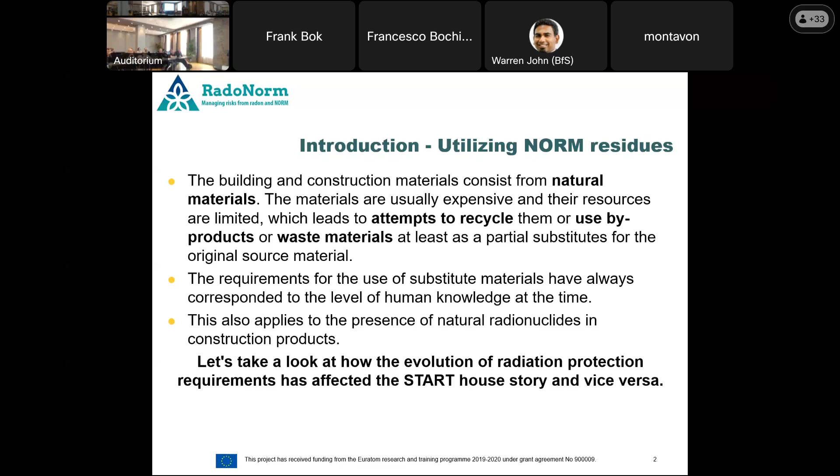If we want to reuse materials, we have to be aware how they can influence our product. And of course, this is strongly related to our knowledge, which changes in time. And this is not only for natural radionuclides present in construction products, but for many other things like toxic metals and so on. But today I would like to talk about the old story which we have in the Czech Republic, the case study of start houses, and how we can benefit now from the past.

So let me describe the case study. For some of you who already know the topic, there will be nothing new. But for those who see this for the first time, I will briefly describe what happened. There was a small power plant burning coal, but some of the coal had elevated content of radium and uranium, and the slag was valuable material also 50 years ago. So the state enterprise Prefa Hyskov produced slag concrete panels out of this slag and built several apartment houses at the beginning of the 60s last century.

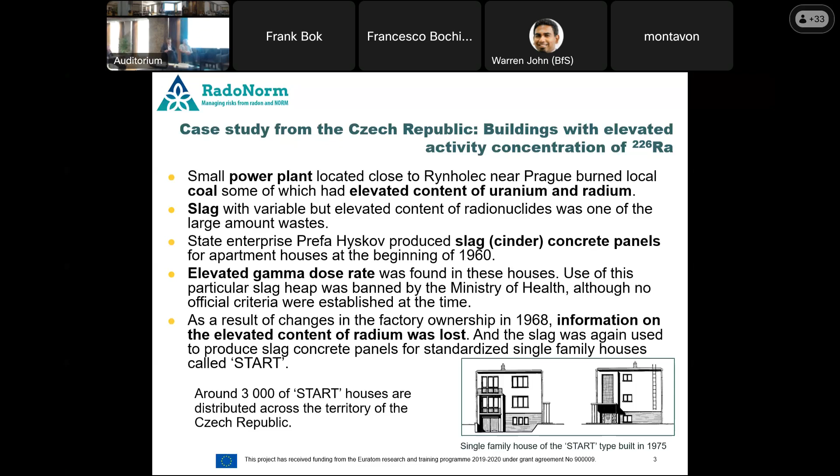Then, by surprise, elevated gamma dose rates were found, and the use of this slag was prohibited by the Ministry of Health. But during the changes in ownership in 1968, the information about this contaminated slag was lost, and the slag was used again for production of concrete panels, which led to more than 3,000 single-family houses built out of these slag concrete panels. You can see in the picture how they looked. There was a standardized project for these buildings.

What about the radiological surveys in these houses? Well, the concrete panels were used for supporting and peripheral walls and also for building a chimney, and the rest of the walls were from standard bricks. So the variation of gamma dose rate was quite high in the building. There was an extensive measurement campaign between 1989 and 1991 to determine the situation in individual houses. They found all the owners, all the houses, and measured in all of them.

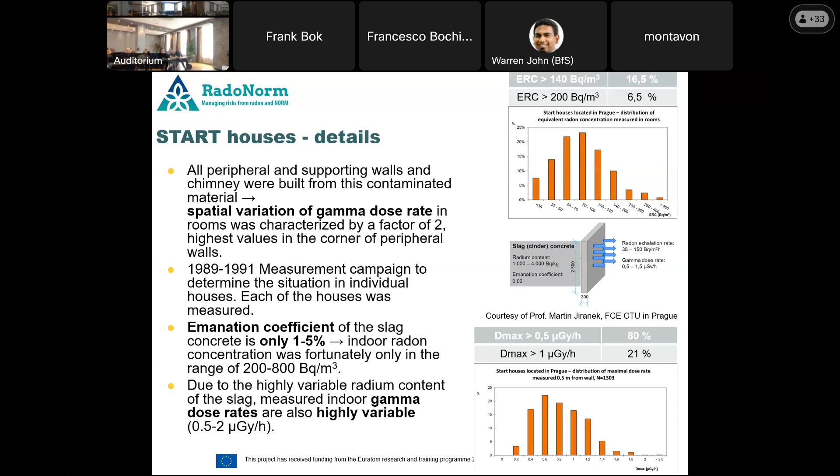So, for example, from the Prague region, you can see the charts of the distribution of equivalent radon concentration, and you can see that it was not that extremely high. But you can see also the distribution of gamma dose rate, which was quite spread, from below 0.5 microgray per hour up to 2 micrograys per hour. But these were quite few cases. What is important here is that the emanation coefficient of radon was quite low, only 1 to 5%, which caused not that high radon concentration indoors.

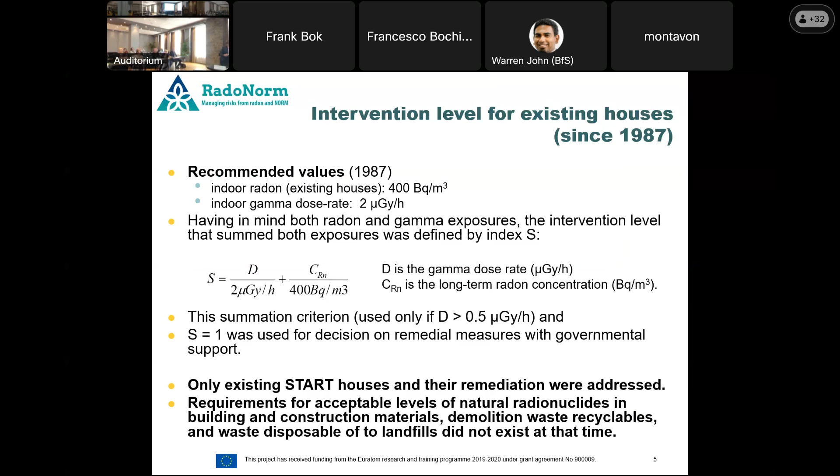The situation and the discovery of this case caused changes in the legal framework of the Czech Republic, Czechoslovakia at that time. At first, it was applicable only to start houses, and there was a recommended value by the ministry on indoor radon concentration and indoor gamma dose rate, and there was a defined summation criterion, mainly used for decisions on remedial measures with governmental support. No other actions on building materials and radon were taken at that time.

But after the Velvet Revolution, there were a lot of people who wanted to solve the situation with their houses, which caused further development of the legal framework and resulted in several implementation steps of protection against elevated concentration of natural radionuclides in building material, and radon concentration indoors was also reflected in these decrees or legislation implemented in the Czech Republic.

So you can see, I will not go into detail because you can read it, but just to point out that from the beginning, from the discovery of the start case or Prefa Hyskov case, the criteria were quite strict for habitable buildings. For the mass activity concentration of radium-226, the allowable was only 120 becquerels per kilogram, which is quite low for present days. Then it was a bit exceeded, and still there was an action level and limit value, because it also reflected the exhalation of radon from the building material.

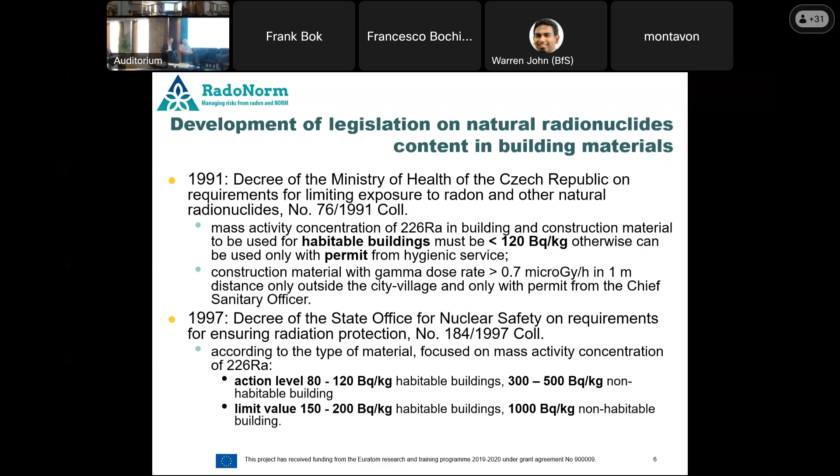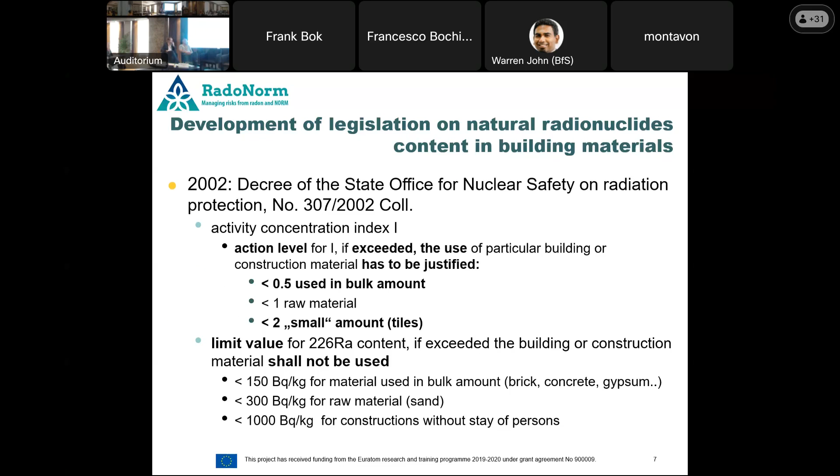So you can see that there was a distinction between habitable buildings and non-habitable buildings. And also the building material was not building material itself, but also construction materials. I mean building material as it is understood by the EU BSS currently. Then the next step was the implementation of the activity concentration index. And still there was a distinction between requirements on the activity concentration index and the limit value for radium-226 as a source of radon.

Skipping from legal framework development to standard life, thanks to the effective legal framework, there was no more issue with building material contaminated with natural radionuclides, which were not available on the market anymore. But still we had the start houses, and they changed owners over time. They were inherited or sold. And unfortunately, a lot of information has been lost over time, on purpose or just lost. And the elevated exposure to radiation has also been subject to several lawsuits.

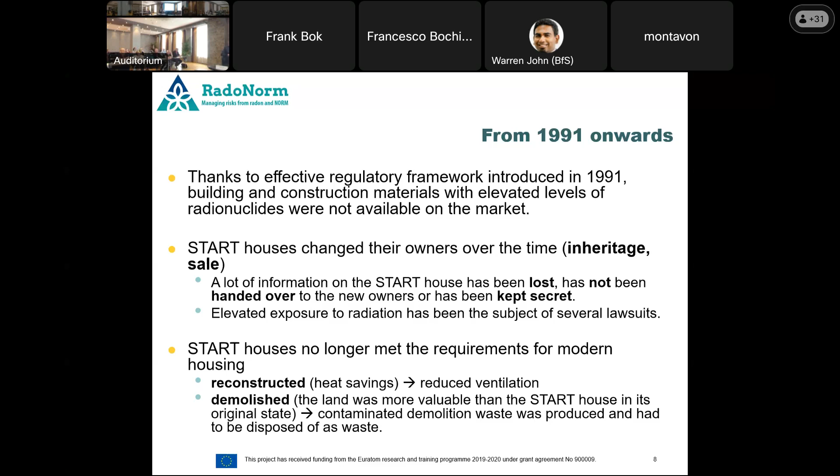And as time went on, start houses were no longer acceptable for some of the owners, for the modern style of living. So they were reconstructed or demolished, because the land had a much higher value than the building itself. So let me focus on the reconstruction, which for these old buildings is usually focused on reducing the cost for heating. So they were thermally retrofitted.

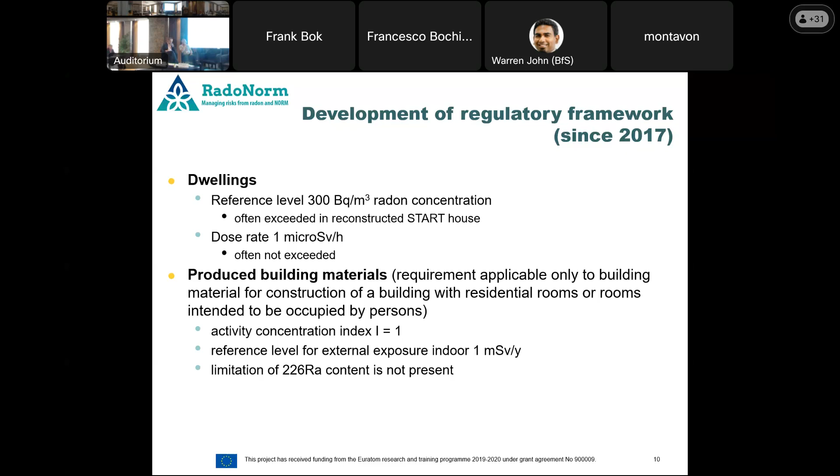So jumping to modern days, the development of the regulatory framework continued slowly. We implemented the EU BSS, the latest directive, in the Czech legal framework. So we now have a reference level for radon concentration, which is often exceeded in the start houses compared to the situation before. The reference level for gamma dose rate is 1 microsievert per hour, which is usually not exceeded. Produced building material, only for habitable buildings as prescribed by the EU BSS, is under control. There is a requirement on the activity concentration index and the reference level for external exposure indoors. It should be less than 1 millisievert per year. But we lost the requirement on maximum content of radium-226 in the building material.

What I would like to present you now are brand new data we have in the Czech Republic, and they are connected to air exchange rate measurement. I mentioned before that air exchange rate is quite important when we modify our buildings to the modern style of living, which usually requires reduced cost for energy and low energy consumption. So air exchange rate is defined as the flow rate through a building normalized by its volume.

And on this chart, and on the next slide you will see it in more detail, you can see the monthly average air exchange rate measured in nearly 300 dwellings, which was done as a part of a research project, which is coming to the end in the Czech Republic. It's basically the representative survey of radon, and connected to it was the measurement of air exchange rate.

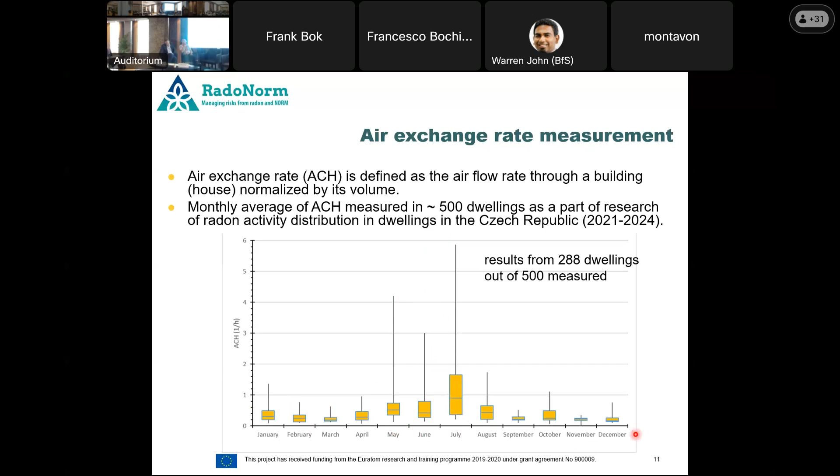So you can see that it's by month, and there is nice variability during the year. I will try to use the laser pointer. You can see that January, the winter period, and the summer period differ a lot. During the summer the ventilation, the air exchange rate values, are quite broadly distributed. During the winter, they are quite close and people save. They are not ventilating much.

So here you can see it in more detail. And also we added 2 lines representing the minimum hygienic standard ventilation, which is 0.3, and this value is prescribed by the technical standard applicable in the Czech Republic for habitable rooms. And also 0.5, which is since 2012 the minimum required air exchange rate in habitable rooms by a decree on

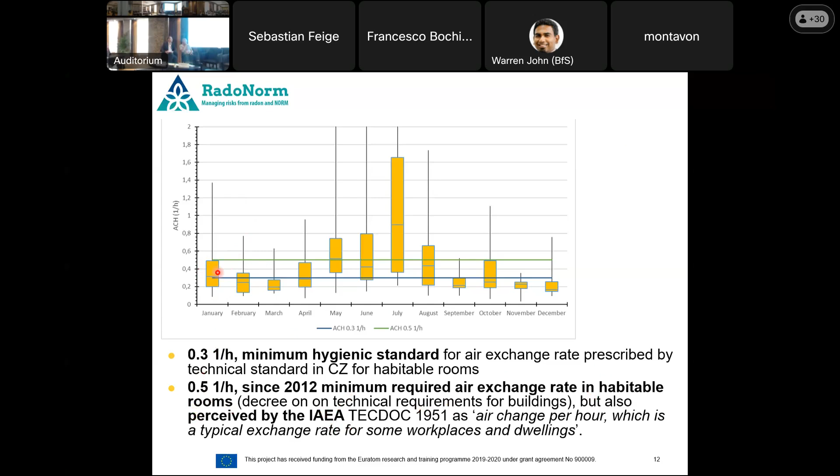technical requirements for buildings, but also this value, 0.5 changes per hour, is perceived by the IAEA TecDoc 1951 as the air change per hour which is typical exchange rate for some workplaces and dwellings. And you can see on the chart that we really do ventilate much less.

So why is it important for reuse of NORM residues? If we have much lower ventilation rate, then having the same activity concentration and emanation rate, we will get much higher radon concentration in the building which is built out of this material. We were lucky that the slag concrete panels had very low emanation coefficient or exhalation coefficient, around 2% only. And the gas silicate bricks have 10 times higher emanation coefficient, which I know is a conservative calculation, but the radon concentration may reach up to 4,000 becquerel per meter cube.

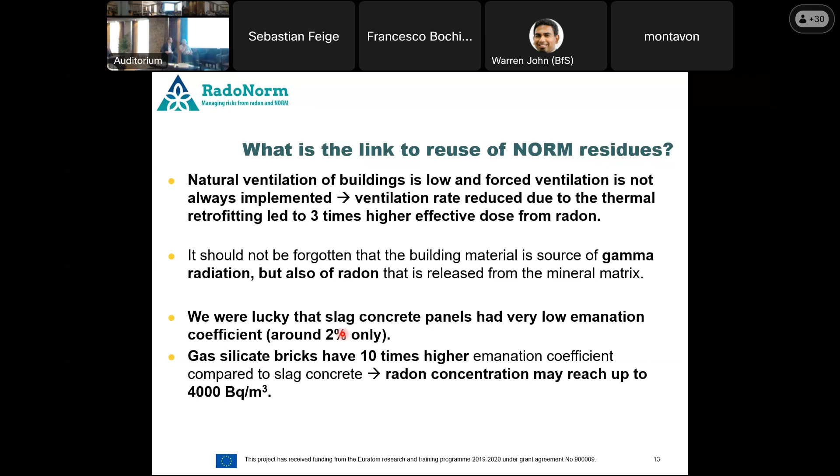So by this, we want to emphasize that it should not be forgotten that the building material is, yes, a source of gamma radiation, but it's also a source of radon, which is released from the matrix.

Few more comments on the reuse of residues. The EU BSS focuses on building material, which means the construction products which can be used to build habitable buildings. But there are also products. The manufacturer can put on the market a product, which can be, for example, a recyclate, on which there are no requirements on content of natural radionuclides.

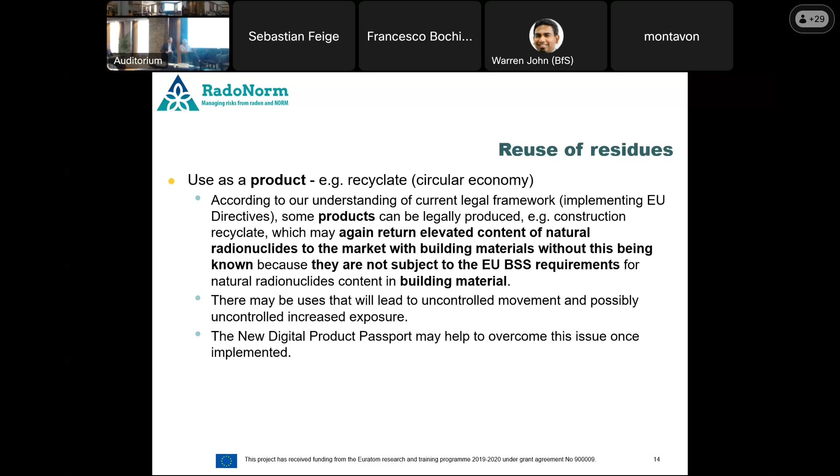So we see this as a way how there can be some uncontrolled movement of possibly contaminated material, which can be again put on the building market. Fortunately, there is something which is called, or which will be called, a digital product passport, which probably may help to overcome this issue once it is implemented, and it's still under discussion, as I was told.

So coming to the summary, definitely it is beneficial to use NORM-based products, byproducts, residues, it depends how you call it, because it's better to use them rather than to dump them to the landfill. But we have to know their properties, and among the physical and chemical properties which are usually being tested, we have to know the activity concentration of the radionuclides. Otherwise, the history may repeat.

Regulation of both the content of natural radionuclides and radon exhalation is gaining importance, especially because the ventilation of the buildings is low, as you saw on the box plot. And unfortunately, there is still limited harmonization between indoor air quality programs, energy saving programs, and radon action plans. Actually, it was proved also by Tanya Perko's study.

And the last comment, we should keep the communication channels open, even for the cold cases, to remind people what happened in the past so they can benefit from it in the future.

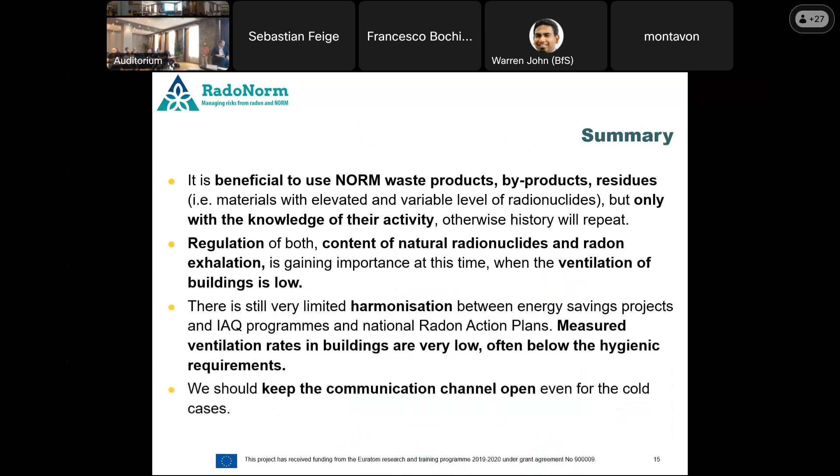There are some of these, but the history, I think, was never published in English. I mean, the history. I remember we have published, regarding these houses, the energy consequences if you make an energy conservation of such buildings. We have published some in Radiation Protection Dosimetry. It is important, but it's not the beginning of the story. Yeah, I understand.

And Bernd, if I remember well, has raised his hand. Bernd, are you there? Yes, I'm here. Thanks, Katharina, for your nice presentation. I want to point a finger at one topic. You said something about reuse of this material. Indeed, this will be a hot topic in the next few years in general, not only because of radiation protection and high content of radium, thorium, and potassium, but also because of other substances inside building materials.